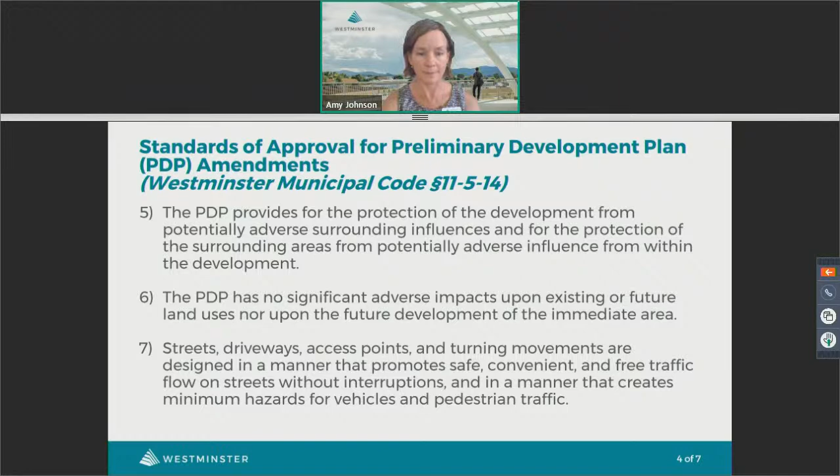The final criteria ensure that the PDP identifies any land dedications that may be needed. Staff finds that the PDP amendment generally meets these criteria. As mentioned on the previous slide, the development is providing left turn and bike lanes in right-of-way on 108th Avenue. The PDP amendment also identifies the southeasternmost corner of the property for public land dedication.

The applicant is proposing 85 units of senior housing, which means a projected population of 127.5 persons. The public land dedication requirement is 1.53 acres. The city is requiring physical land dedication for 0.638 acres, and the remainder will be paid with cash in lieu for 0.892 acres. The fair market value of the land will be determined with an official development plan, or ODP, for the purposes of the amount to be paid.

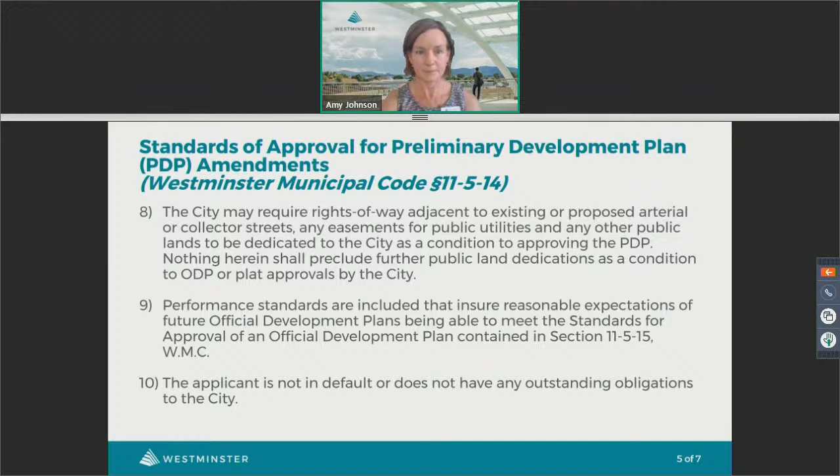As a result of staff's thorough analysis of the PDP amendment criteria set forth in section 11-5-14 of the Westminster Municipal Code, staff recommends holding a public hearing to review the proposed PDP amendment, and that the Planning Commission recommends approval to the City Council.

Staff believes that the proposed PDP amendment meets three goals of the city's strategic plan. It supports the goal of creating a vibrant, inclusive, and engaged community, exhibits a beautiful, desirable, safe, and environmentally responsible city, and promotes ease of mobility.

And now the applicant has a presentation to share with you.

Go. Can you hear me okay, Amy?

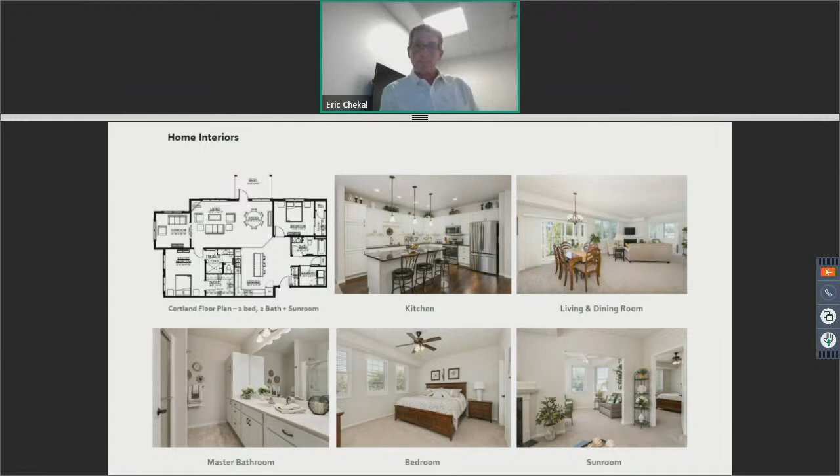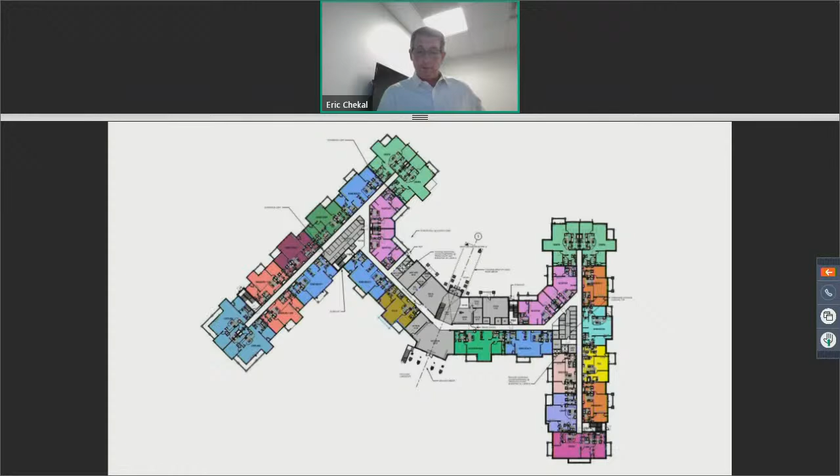In addition to the amenities on the first and second floor, we also have an underground garage with 85-plus heated parking stalls. There are also places for storage, a spray car wash, vacuum for your vehicle, a hobby shop, pet wash area, garden supply storage, and bike maintenance shop. There will be electric car charging stations and other amenities down here. This is also where all the trash ends up—everything gets chuted down into the garage, so that's where trash is stored and picked up once a week, just like at a regular single family detached home.

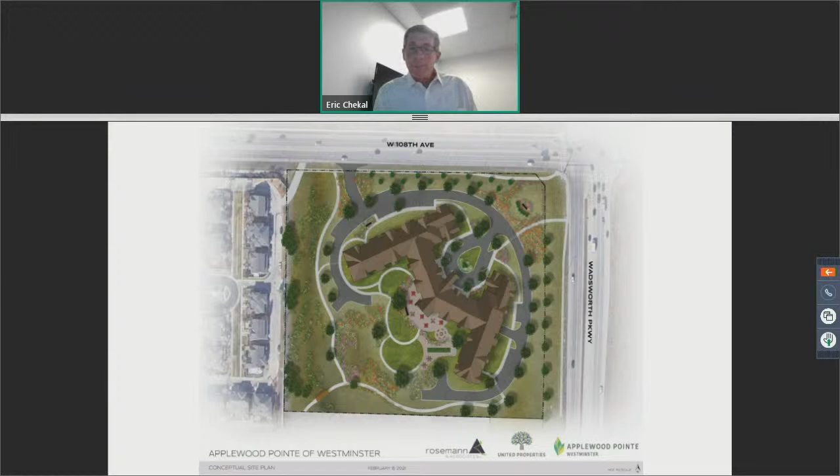I wanted to show this slide real quick. Amy had talked about the open space dedication, that's at the southeast corner there, shown in the hatch. Also, on the west side of the property, the left-hand side, we're providing a trail connection to the Village at Walnut Grove, our neighbors to the west. That'll be their second connection down to the Walnut Creek regional trail system.

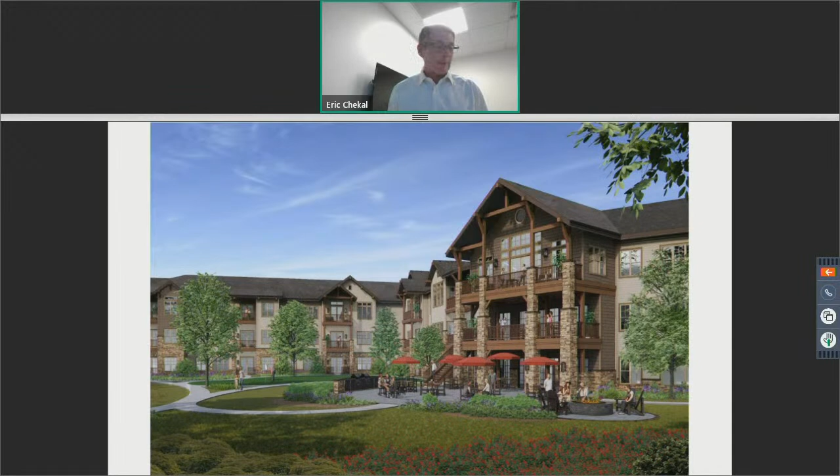So that's all I have. Thank you for your time. We're very excited about this opportunity to build this project in Westminster. We currently have 58 reservations. We've been hosting information meetings for the last couple of months and have already seen great turnout, with 58 reservations in hand from seniors who are anxious to see this development take place. I'll be here to answer questions, as well as the gentleman I mentioned earlier. If you have any specific questions for me or for them, please let us know.

Thank you for the presentation. I want at this time to ask any commissioners if they have any questions for staff or the applicant. Commissioner Zhang.

This is a question for Eric's team and staff about the intersection at 108th and Wadsworth. How will that impact traffic flow on Wadsworth, and for the residential neighborhoods already there? I would like to ask Heath Klein, our traffic engineer, to address that please. Thank you, Commissioner. The traffic impact due to this development will be really minimal.

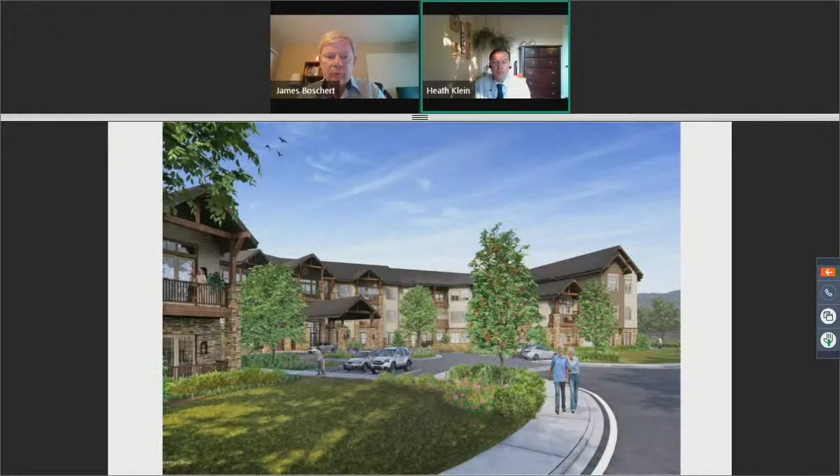The trip generation from this site doesn't cause any real problems. In fact, this project will help with the mobility and movement of traffic by adding dual lefts for eastbound onto northbound Wadsworth Parkway, and we're also providing a right turn lane onto southbound Wadsworth Parkway. That will allow two future eastbound lanes to cross Wadsworth and continue east on 108th. They've done a good job, and the traffic volumes on both roadways are high enough that this does not add significant volume.

Thank you. Any other questions from commissioners?

I actually have a question for staff, if I missed this, I apologize Amy. Did you mention if the sidewalk along Wadsworth will be connected down to 104th Avenue? I did not mention that. I know that comment and question was in the materials attached to the memo this evening, and we had answered it around the time of the neighborhood meeting. The sidewalk will be built only adjacent to this property because that's all we can technically require of the applicant at this time. So where you see the property line ending, that will be the extent.

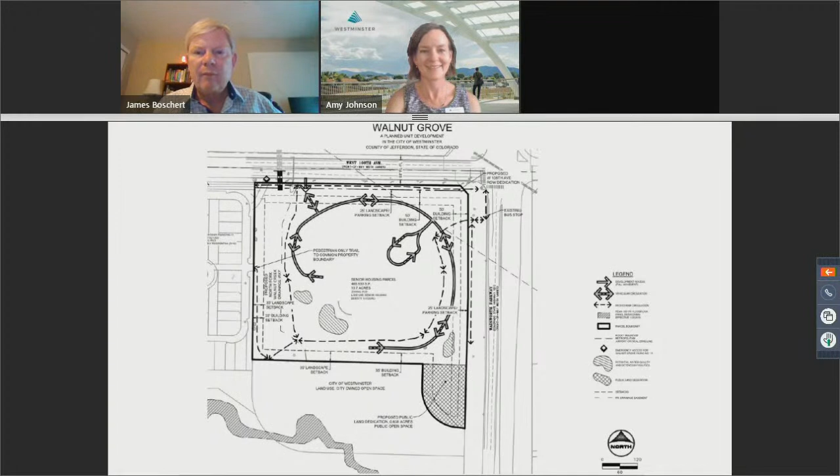Hi, everyone. This is Nicole Ankeney, and I'm a senior landscape architect with the Parks, Recreation, and Libraries Department.

At this time, it's something we're going to look into, but it's an extensive amount of sidewalk, and the biggest barrier is where it crosses Walnut Creek. The bridge on Wadsworth Parkway does not currently allow for a sidewalk. So that's something we will be working on with our transportation and mobility group. You heard from Heath Klein, our transportation engineer, but that is something we will try to address collaboratively through open space and transportation and mobility. We also believe that is an important connection. However, that is going to be fairly costly as we figure out the best route to make that happen so that we can meet all accessibility requirements. Thank you.

Okay, do you have a time frame? Is it 10 years probably or less?

We might have lost her. Nicole, are you still there? Yes, I'm still here, sorry, there's a bit of a delay on my end.

I apologize, at this current time we do not have a timeline for that construction to occur. We need to partner with community development, transportation, and engineering to figure out the best route before we can give any kind of timeline. Once we understand the cost ramifications, we can work that into our capital improvements budget, and at that point we would have a much better idea as to the timing. We do hope to have that done within the next 10 years.

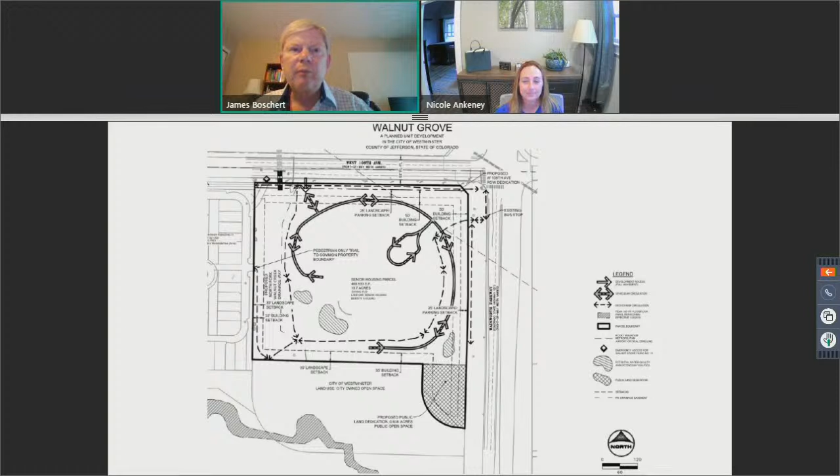Seeing no further questions, at this time I'd like to open the public testimony. Much of the testimony has been received in the form of emails and voicemails.

Jennifer, do we want to play some voicemails at this time? Boschert, we don't have any voicemails to be played. We did have a speaker request to speak during the live meeting, but that person has not joined us. I've reached out and have not heard back from the speaker. I've offered for them to leave a voicemail while the meeting is going and during the public hearing portion, and I have not received a voicemail either. So at this time I don't have any public testimony to be played or heard into the meeting.

Okay, so what we have is public testimony that was submitted in writing previous to the meeting, of which you all have copies. That is correct. Great, thank you.

Well, with that in mind, I will go ahead and close the public testimony at this time and ask commissioners if they have any questions or if they would like to make a motion on this application. Don't be bashful.

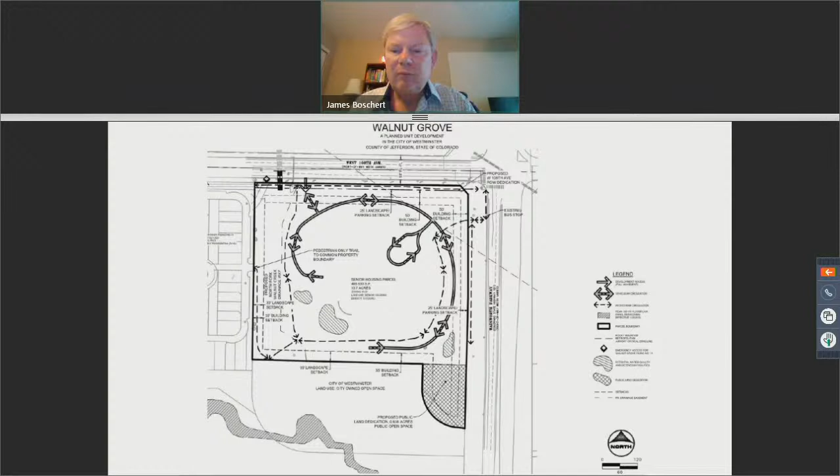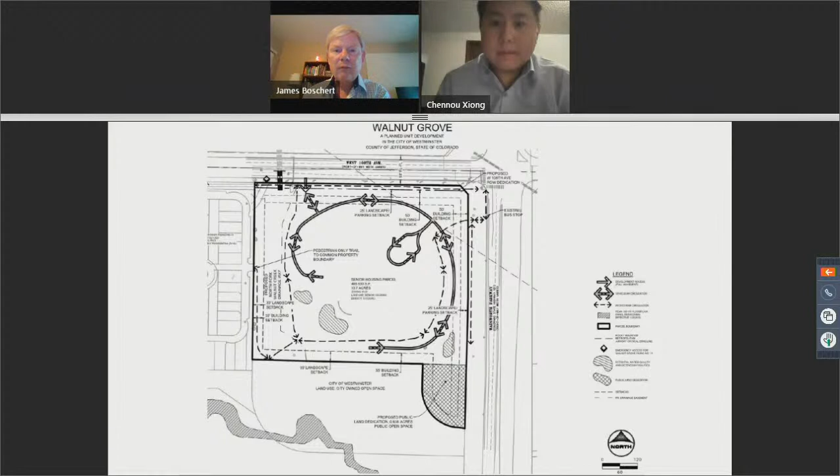Can we get a roll call vote, please? Chair Boschert: I'm in favor. Chair Boschert is in favor. Vice Chair McConnell: Yes. Vice Chair McConnell is in favor. Commissioner Dunn: Yes, Commissioner Dunn is in favor. Commissioner Mayo: Yes, Commissioner Mayo is in favor. Commissioner Xiong: Yes, Commissioner Xiong is in favor. Vote is complete. Very good. It passes unanimously.

At this time, I would ask if there's any old business or miscellaneous business. Mr. Shakal, thank you, thank you very much. Looks like there's no old business or miscellaneous business, so I will close the meeting.